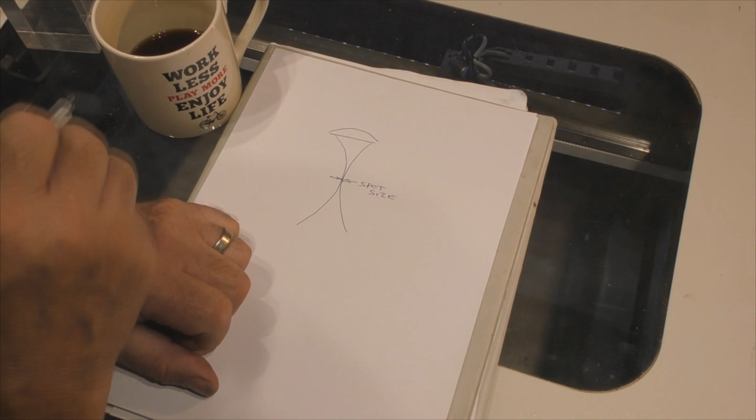In this machine I've got a 1.5 inch lens. Now a 1.5 inch lens is a very short focus lens, and basically the beam does something like this. It comes in very quickly to a very small waist, which we've spoken about as the spot size, the smallest possible focal point we can get with a 1.5 inch lens, which is around 0.075 of a millimetre.

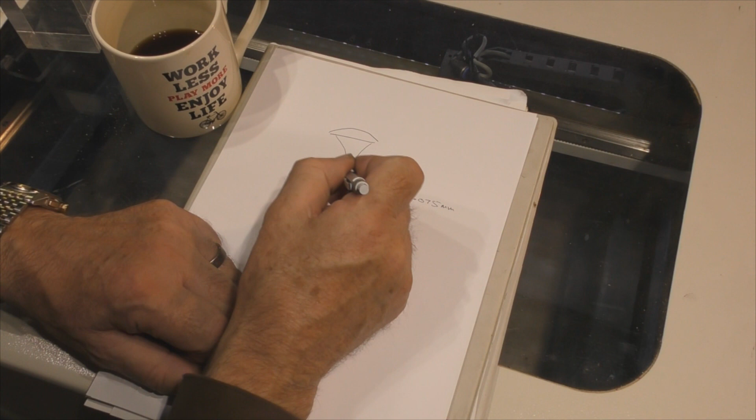Okay, that's not important today. What we're more interested in is what happens up and down from this point. We only get a very short focal distance here, what they call the working distance, and it's only less than 1 millimetre above and below the spot size, the focal point.

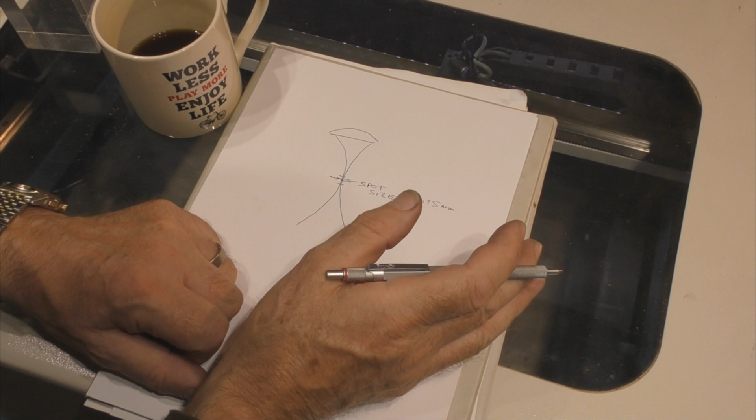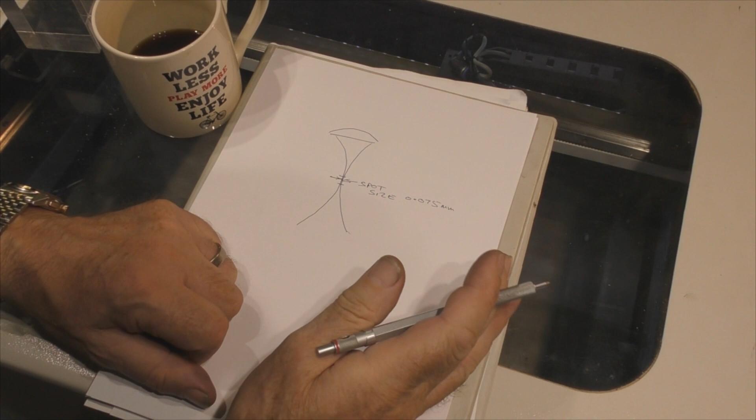In fact, it's a lot less than 1 millimetre. But again, that's of interest only. What we're going to see today is something a lot more interesting. After this fairly parallel area, we get a fairly rapid expansion of the beam, and the energy density—I've talked about this before—can best be described with this pen.

Now I can jam the end of that onto my hand very, very hard. Do you think I'm going to be stupid enough to do the same thing with that end? Of course not, because we've got an energy amplification taking place there, with the energy amplified right down to a sharp point.

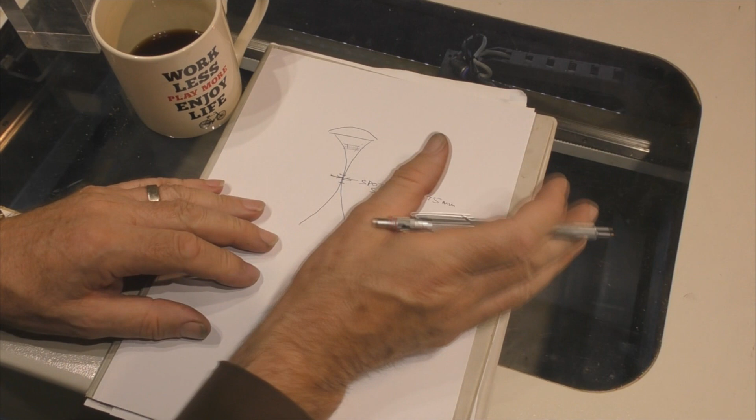And that's basically what happens here. The energy density here is like the end of this pen. It's fairly low, and it can't do much—this is the critical word I like to use. You can't damage the material much with low energy density. You have to have high energy density, where the energy is concentrated into a small area, before you can do damage to the material.

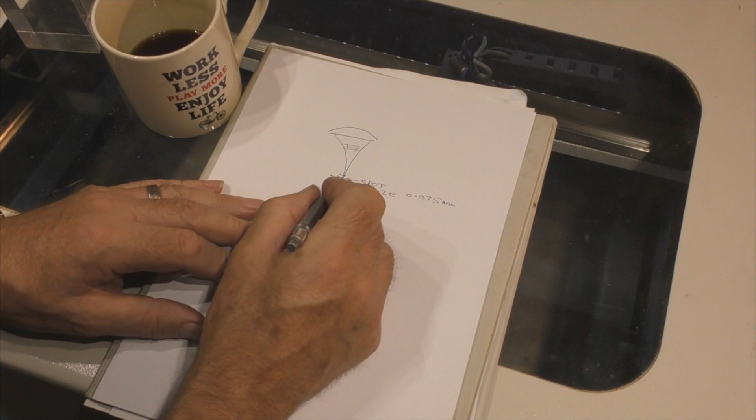So consequently, we've got this point here where we're going to fire the beam at a block of acrylic. There we go. We've got a block of acrylic.

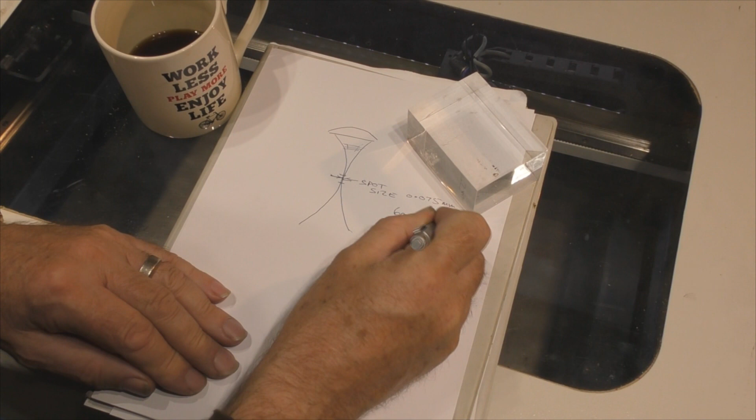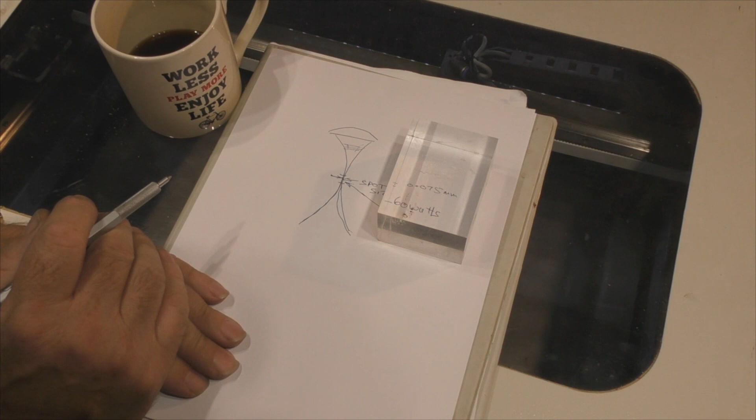Now, what I really want you to do is try and guess how far you think this 1.5 inch lens with 60 watts of energy—focused down into a very small area with very, very high energy density at that point—will penetrate. So my question is, what do you expect to see when I fire the beam into this block? Do we expect to see it spreading out as per this picture, so we can see the shape of the beam?

I'll tell you what we'll do. Let's fire the beam into it from the correct focal distance at the surface. In other words, I'm going to put the spot size on the surface, the correct focal distance, and we'll fire it in and see what happens.

As you can see, this block is 80 millimeters tall. So how far do you think we should be able to fire the beam into that block with 60 watts and a 1.5 inch lens? Bear in mind, the energy density drops off very, very quickly.

Well, write your answer on a piece of paper and put it in a sealed envelope. Don't look at it until afterwards, and then you'll see whether you were right or wrong.

Okay, now you've got a front row seat. I'm going to do this twice because the first time you'll be so amazed you won't actually be able to watch what's going on. I'm going to put my finger on the pulse button and I'm going to hold it.

And your first observation of that result is? Well, I certainly didn't see any major splaying of the bore because of the way the laser beam has grown after it starts to defocus. Look at this large section here where it's virtually parallel. We get a little bit of growth just at the top, but then it runs parallel all the way down. That is substantially bigger than the 0.075 focus point.

So what on earth is going on? This is 80 mil tall and we've gone in somewhere in the region of about 65 millimeters. Now that doesn't mean to say I can produce a 65 millimeter cut with this 1.5 inch lens, which looks as though it should be possible. I'd have to be going very, very, very slow.

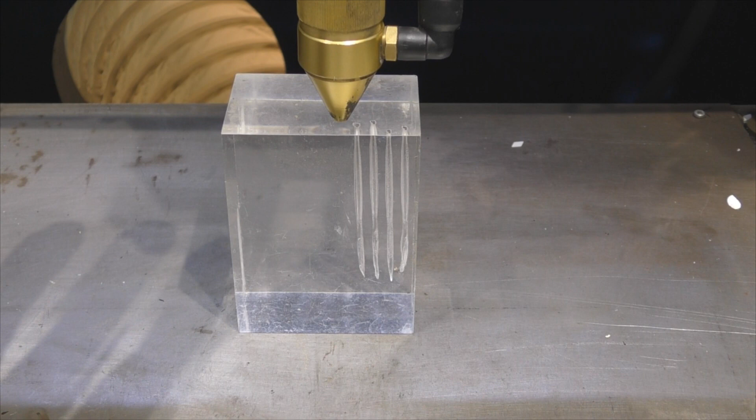Let's change over to a 2-inch lens and see what effect we get. 19 millimeters. There we go, 19 mil. So that's the correct setting distance for a 2-inch lens. Right, there we go. Run out of steam.

But I think if you look carefully, we can see the heating effect. You can see the heat zone around the cut. Now that's a 2-inch lens, and you can clearly see the scroll marks in there, much the same sort of gas dynamics. Doesn't seem to make a lot of difference to the depth.

Now we could try and close the gap up now quite a lot. 7 millimeters. That's 12 millimeters into the material. And that bottom one is the 2-inch lens.

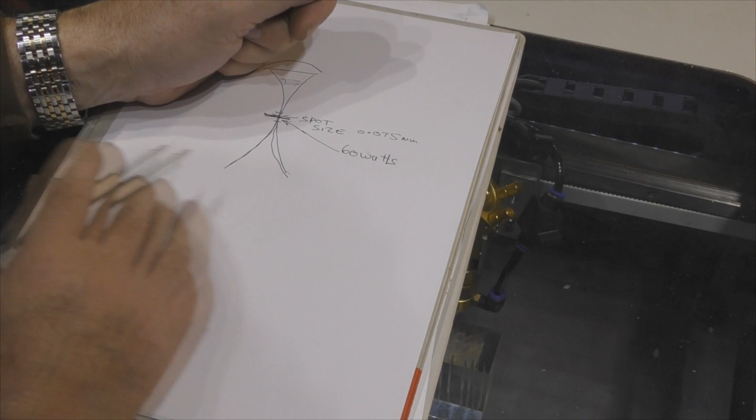We've seen that when we punch a hole in the acrylic, that's the beam, but round the outside of that beam there's a gas pocket which is actually cutting bigger than the beam itself. We have to remember that what we're firing at this material is a beam of light energy, and it's not until that light energy gets absorbed into a surface that it changes into heat, and that heat is what does the damage. In acrylic, the heat evaporates the material instantly, producing a hole bigger than the beam, and the gas that's produced is not as absorbent of the energy as the solid acrylic is. So we've got solid acrylic all the way around, and a little gas pocket around the beam.

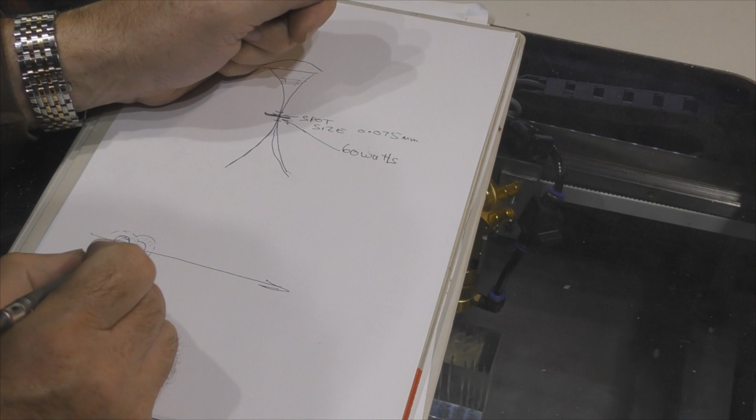The beam is moving at a steady rate, and so it runs across the pocket and can't do anything because there's nothing there to cut—no solid material for the light energy to be absorbed and converted into heat. It's only when it hits the solid material outside the gas zone that it starts to heat that up again, producing another gas cloud around it. This carries on: the beam goes steadily, but it's not producing a solid single cut. It's producing an intermittent cut as it jumps across this gas cloud, hits another piece of solid material, produces another gas cloud, jumps across, hits solid material again, and produces another gas cloud.

And look, here are the marks, the striations. It's the joining up of these spheres of influence, these circular patterns, that's actually causing the striations.

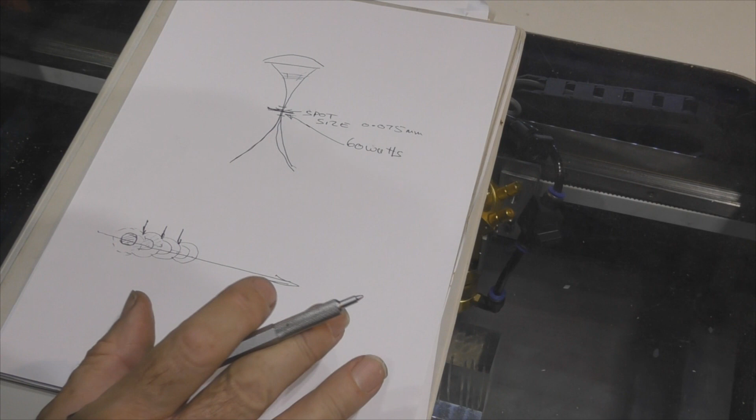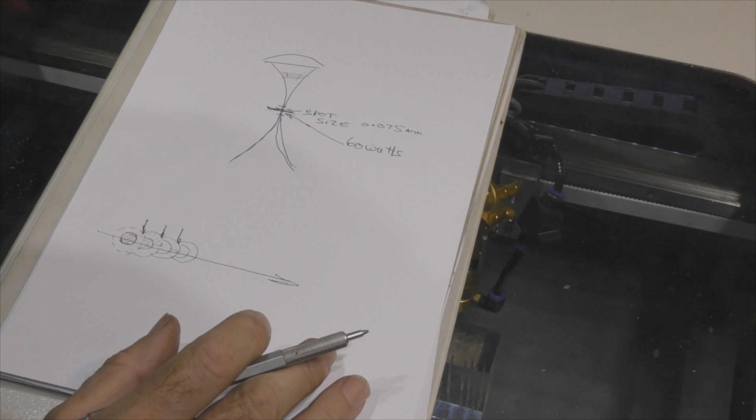I hope that demonstration in that solid block of material has shown you some of the strange things that can go on with the laser beam and acrylic. Acrylic is a very special material—as soon as the light energy hits the surface, it gets absorbed, directly proportional to the energy density. So when we do a mode burn, which is where we fire the beam at a block of acrylic, the block produces a shape in it which looks like that.

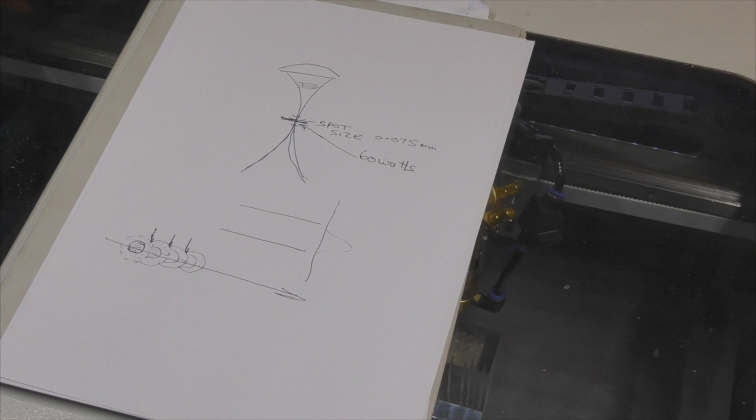And here we've got lots of examples of that—these are mode burns. What that shows us is there's more light energy being absorbed in the center of the cut than there is on the outside of the cut.

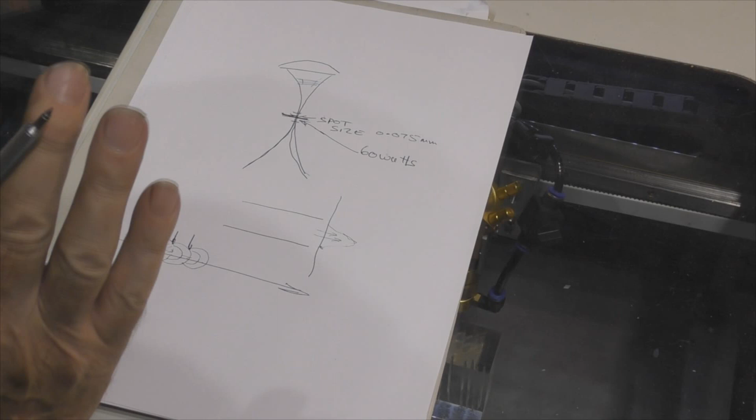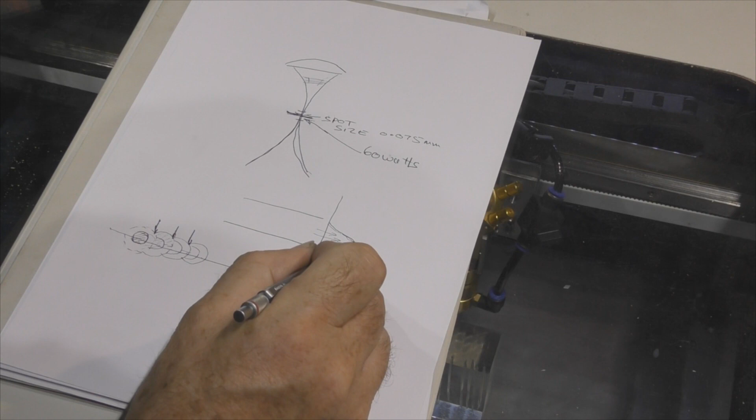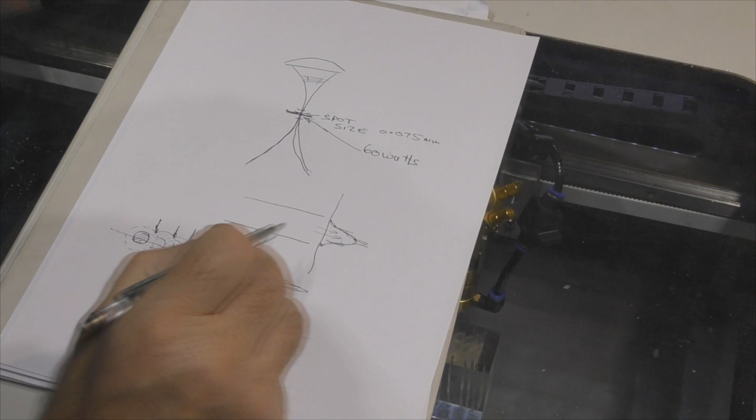This is the point I keep making to you, that the energy density across our beam is not uniform. We've got a very high energy level in the center of the beam, and it drops off, supposedly—if the beam is manufactured correctly—in what they call a Gaussian shaped curve, where probably something like 80% of the power is contained in less than 50% of the overall diameter. But there is energy right out to the edge, just not much.

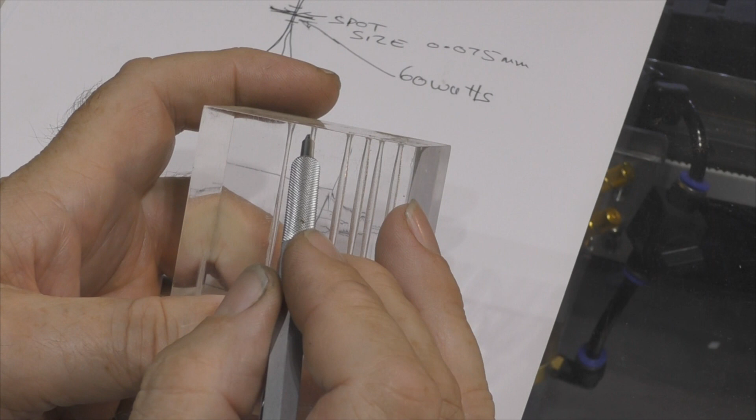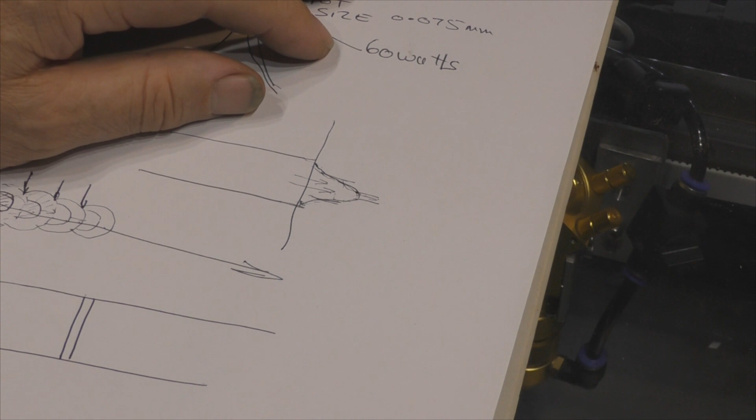When we're cutting, we never actually encounter the situation we've got here, because we've let the laser beam stay on for a huge amount of time. In reality, you never get this effect when cutting. Instead of a straight cut, you might expect, because the beam is shaped like this, to get a cut that looks like this if you drop the beam halfway into the material, or like this if the beam sits on top of the material. But in reality, you'll get the opposite of what you think.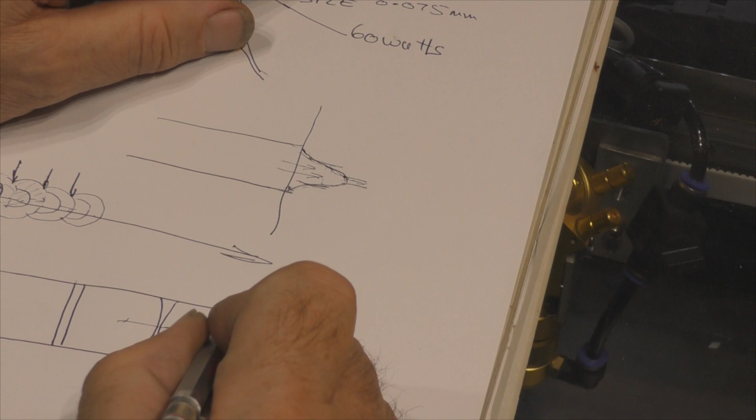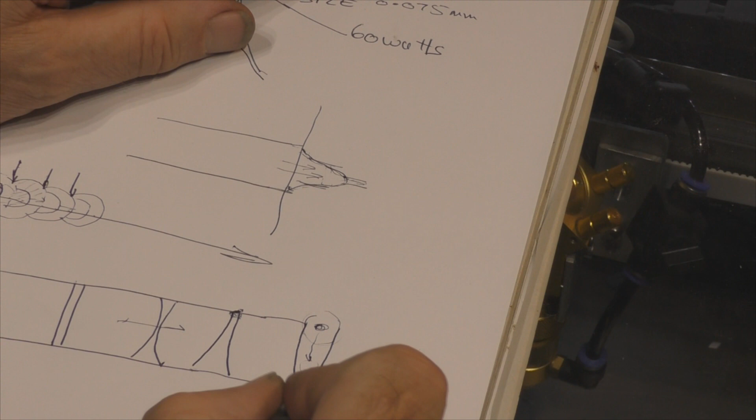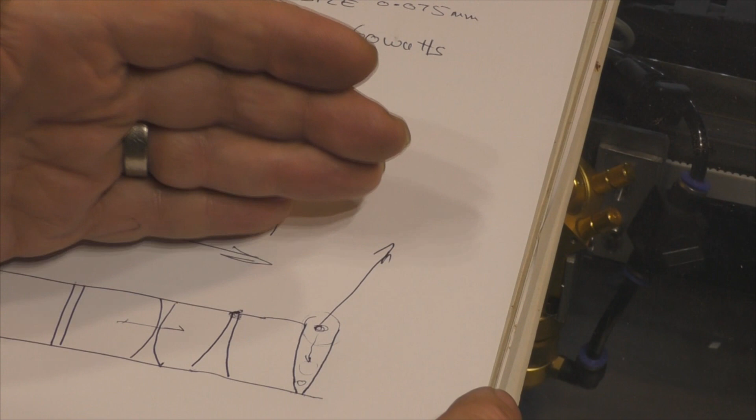If you sit the beam on the surface, you'll get maximum sphere of influence of the heat, and it will get less as it passes through the material. So this high density area will produce a lot more heat around it, and as the energy density drops off, the heating effect gets less—that's why you're limited with your cut when moving through at speed. This isn't the same as the demonstration I just gave you where we held the beam still; that's a static situation, and this is a dynamic one.

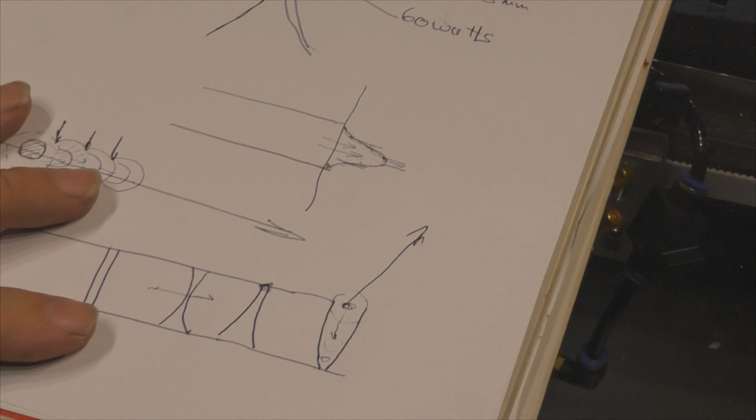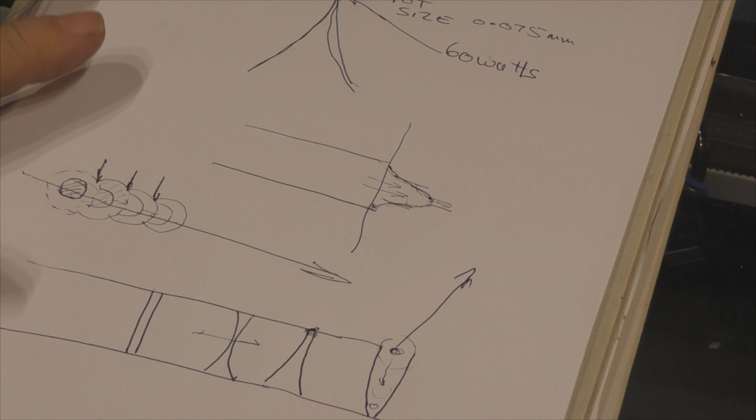Acrylic is an absolutely fascinating material with all sorts of characteristics which, with practice, if you're using acrylic all day every day, you may already be familiar with. But for those who haven't played with acrylic very much, there's a whole new world here for you to explore.